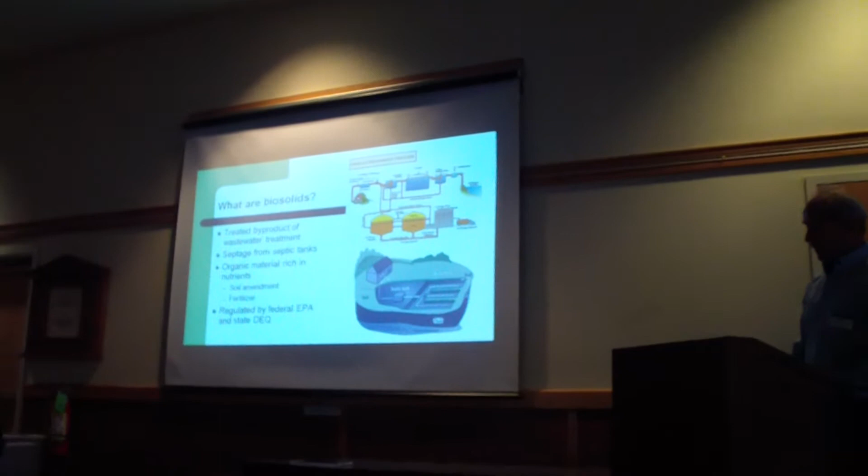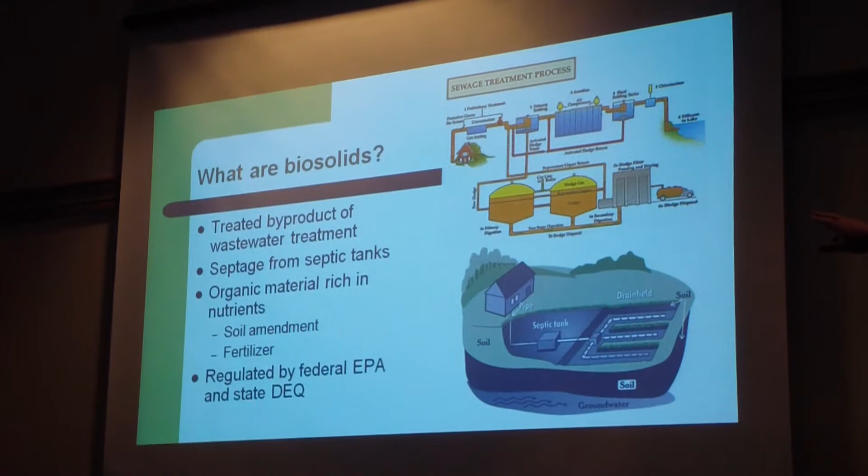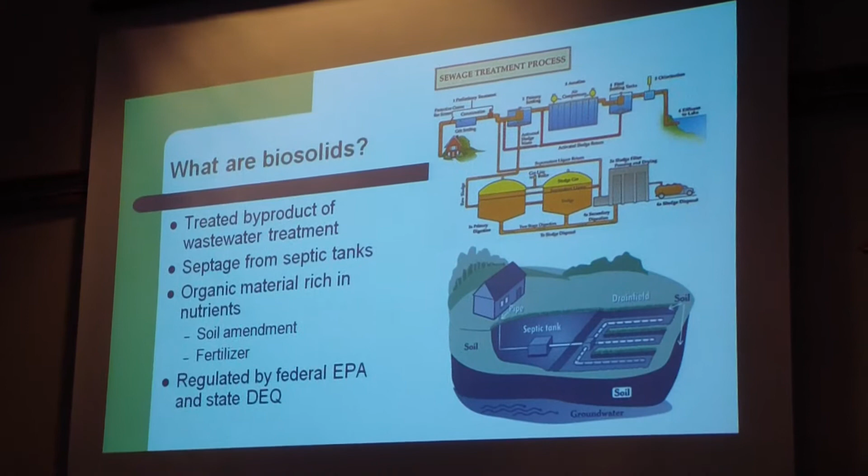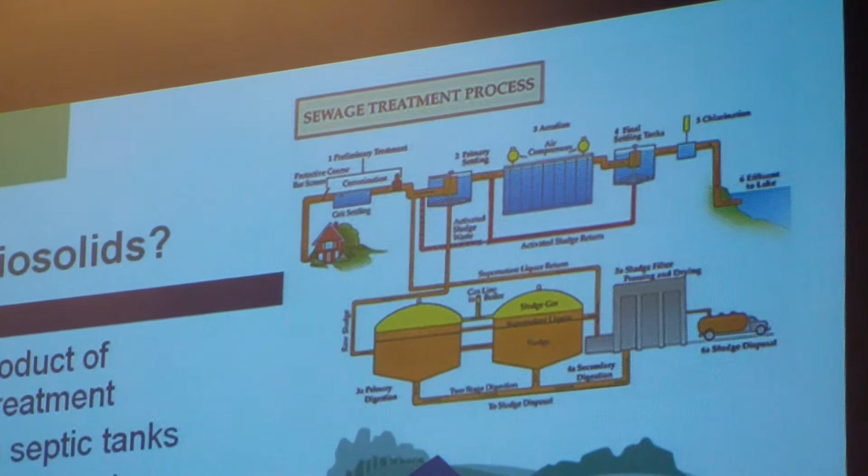So what are biosolids? Biosolids are created in two ways here in the western part of the state. In the top picture you'll see a house, connected to a wastewater plant, usually representative of a city. A single-family dwelling discharges waste to a toilet, which goes into that treatment system, and that is called sewage sludge. For a single-family dwelling in a rural area with a septic tank and drain field, that's another type of treatment and another type of sludge, or septage. Both of these are generated through us, through what we eat.

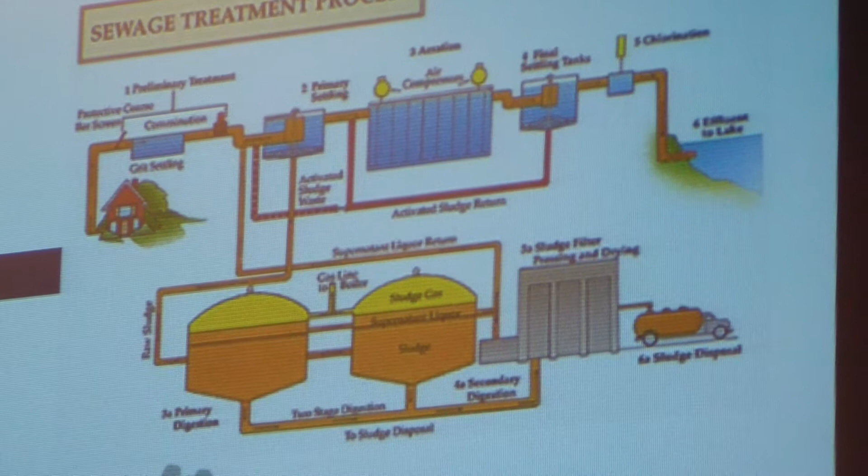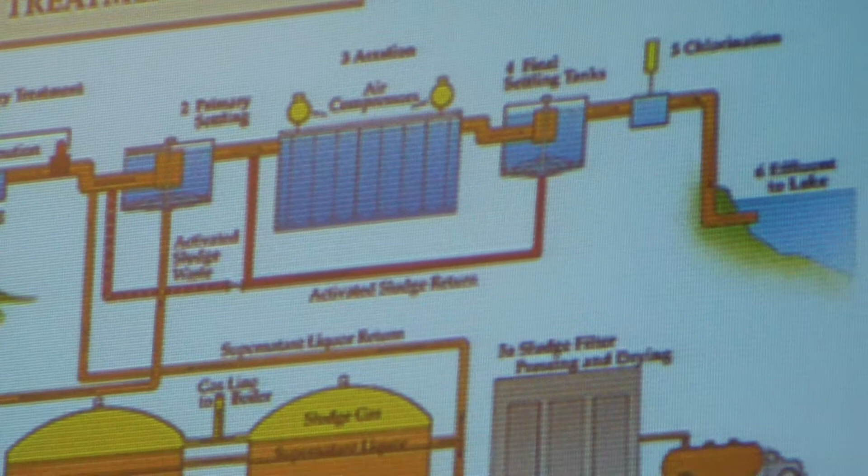The organics are nutrient-rich. They're like a central vitamin for the soil. Once they're broken down and stabilized, they're good for the soil, good for the system. You can sequester carbon, and it's regulated by the EPA and the DEQ.

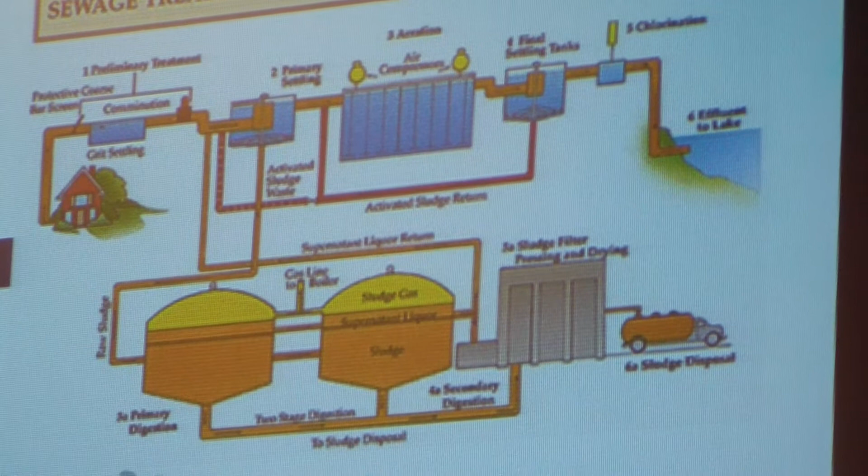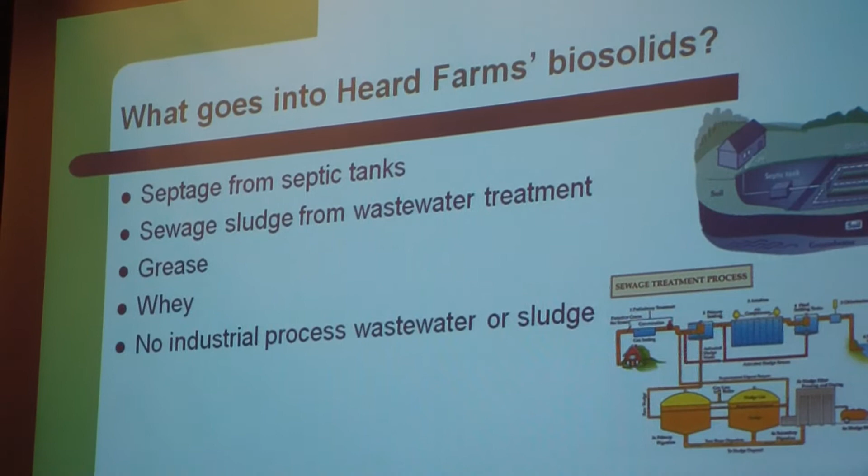So what goes into the Heard Farms facility is, again, the single-family dwelling septic tank. If it works right, it's settling solids and rising up the scum. You've got baffles in your septic tank, so the clear zone, which is the liquid, goes out into the drain field, and that's attenuated by the soils. That's how your soil system works.

When your septic tank gets about 35% full of scum and solids, you get it pumped, and that's what goes to the Heard facility. That's cold anaerobic digestion. It doesn't have a lot of volatile solids, but it's been sitting in your tank for 4 to 12 years, depending on how many people are on the system and how well it's digested. So it's pretty stable stuff that goes into the Heard facility. It's a pound in, pound out — it doesn't get a lot of reduction in that type of waste.

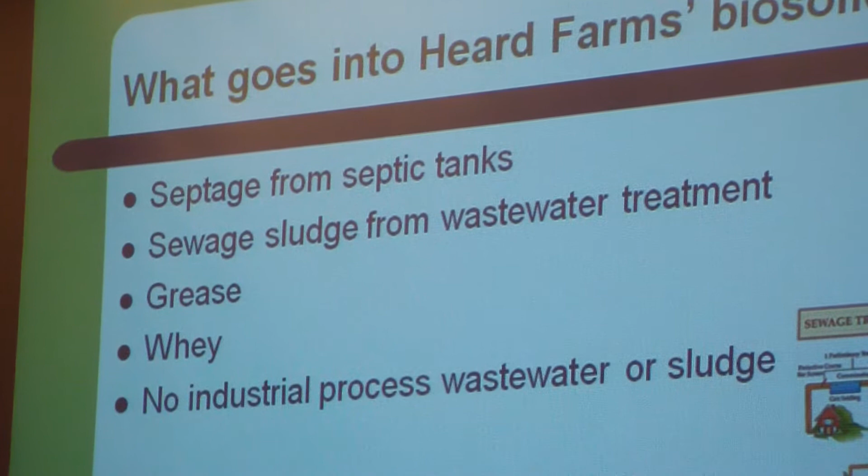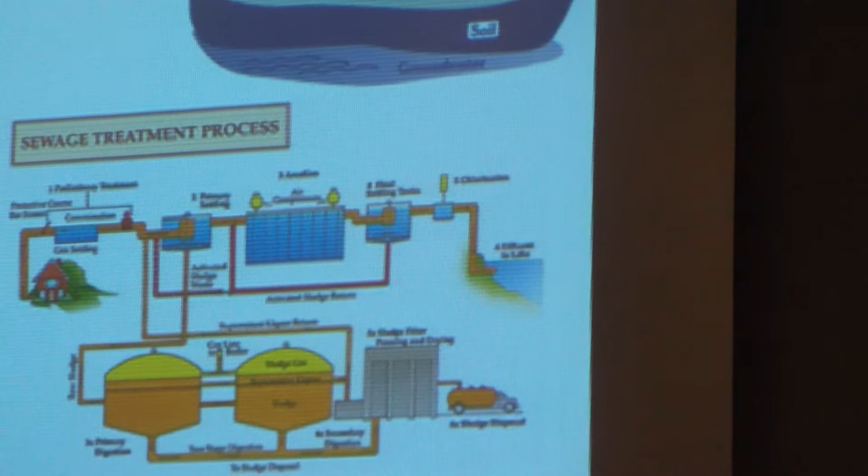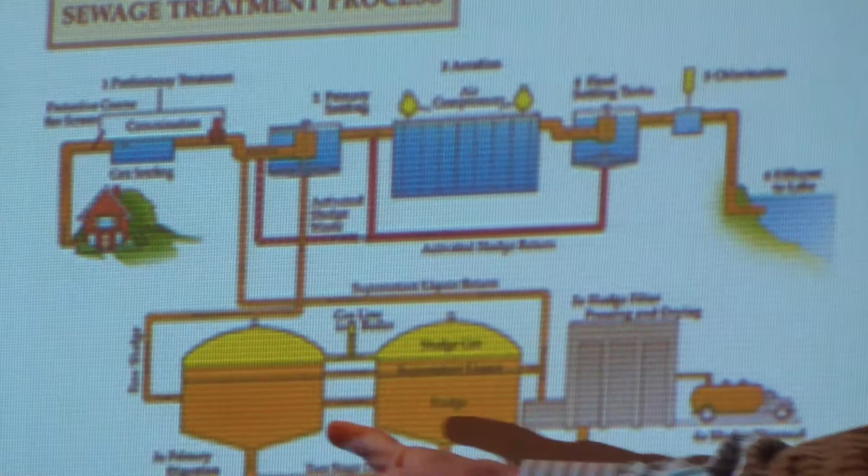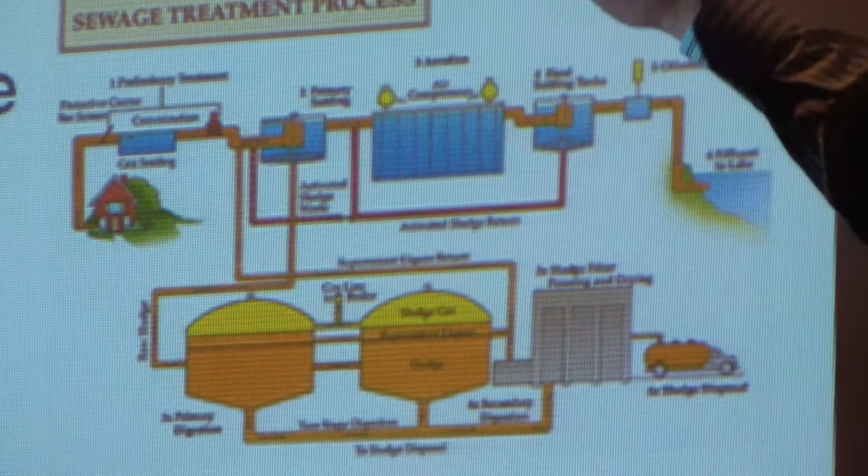You go down to this type of system here, and you've got two types of settling basins before a bioreactor. Both will pull out solids, scoop them up, and put them into bottom basins called digesters. A lot of things come through here that are raw, green, fresh, with a lot of BOD, so there's an opportunity for volatile solids reduction in both of these kinds of digesters. These are the type of things pulled out of a municipal system, put in a truck, and sent to Heard Farms, just like septage would be pumped from a tank and that pumper truck would go to Heard Farms.

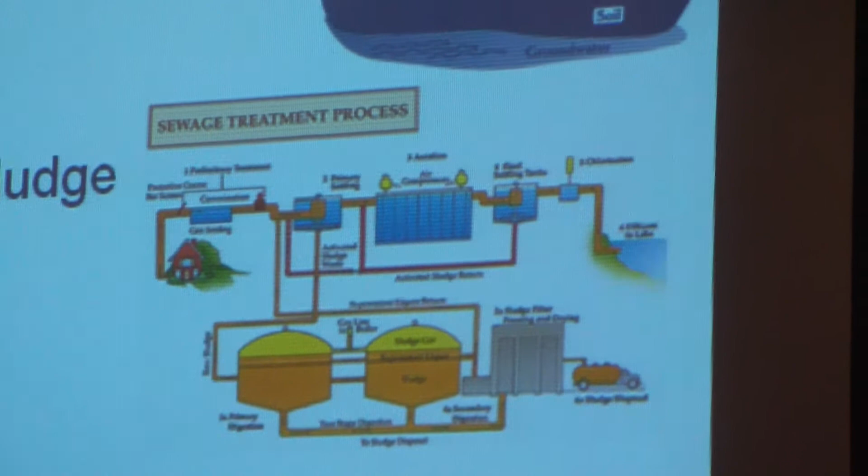And by BOD, Paul, what do you mean? Oh yeah, biochemical oxygen demand. It's how reactive something is — the microbes eat it up and consume oxygen to break it down.

I think that's it. Next slide.

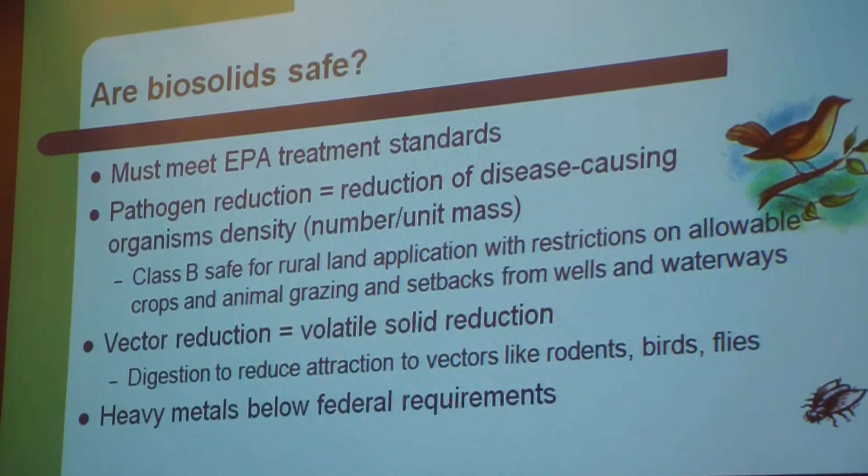So, are biosolids safe? Yeah, you have to meet three things essentially for biosolids to be land applied: pathogen reduction, vector attraction reduction, and metals. Pathogen reduction — what we're looking for is raw sewage, raw manure, any raw fecal matter can have organisms at 10 to the 9th. When we go through that digestion period, either in the septic tank or the wastewater treatment plant, those yellow basins, we get a reduction in pathogens to 10 to the 6th. So we get 3 orders of magnitude reduction, or about 99.9% removed. For biosolids, that means there may be pathogens present, but in small amounts, and it's safe for land application on rural properties and farmland. If it's made Class A, it's safe enough that pathogens are non-detected, and you can put it on your garden. A lot of my front yard is Class A biosolids.

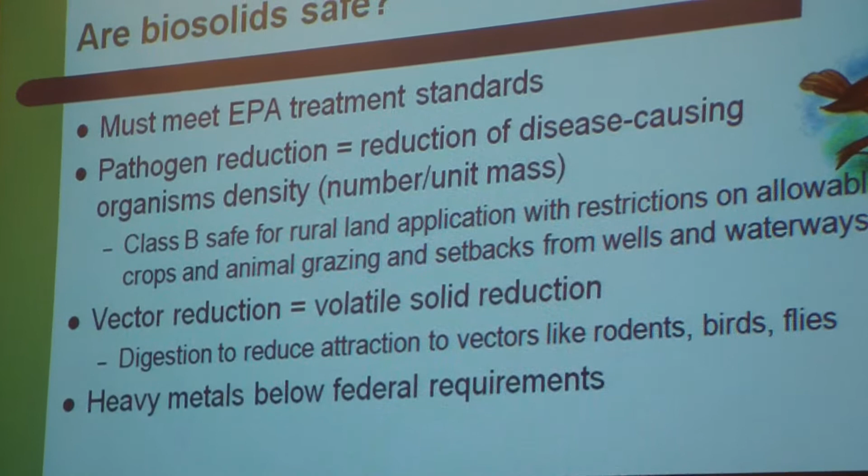Vector attraction is how stable it is. Typically we measure that by a 38% volatile solids reduction — how much the biosolids offer up to the microbes to break down, how much oxygen they consume. That's a measure of reduction, typically done in a wastewater plant. And then metals — again, they're fairly low because it's what we eat.

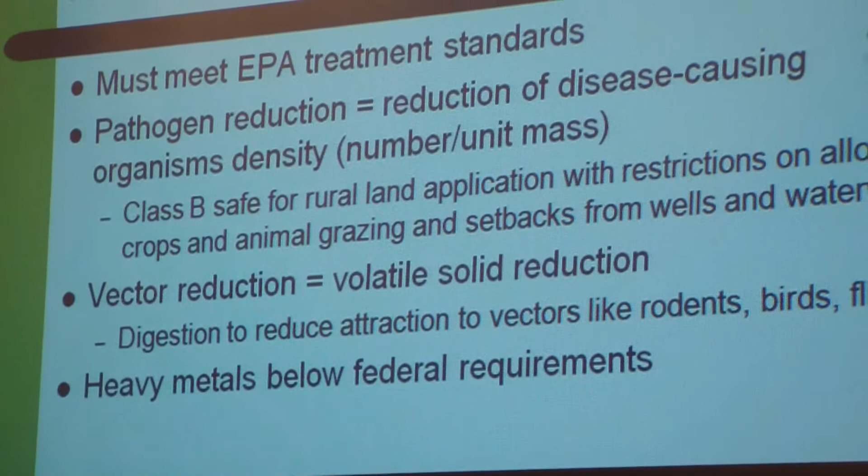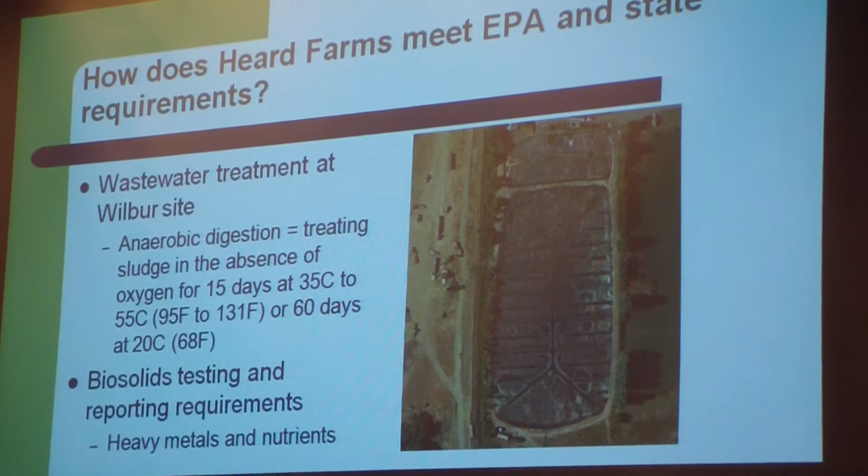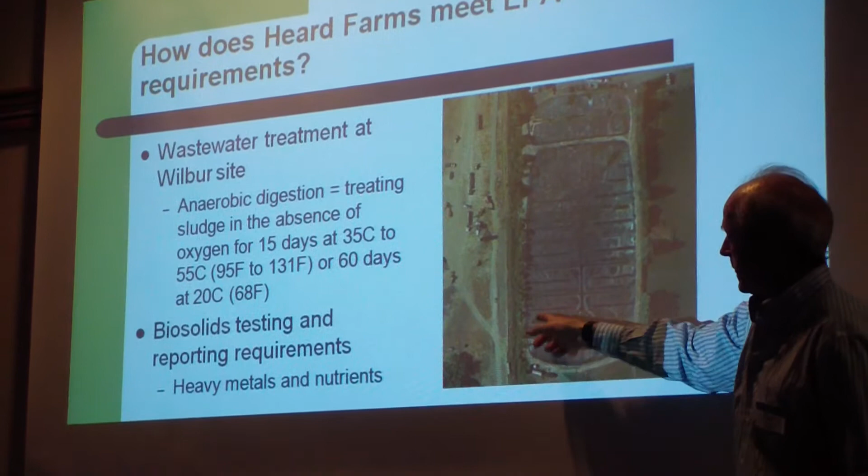So for the Heard facility, it's anaerobic digestion, so there's no oxygen involved. There's a primary cell here, and all the material comes in through a screen. It goes across this primary cell and is pumped over to a larger secondary one. The material is pulled out of the back end of this thing after it's gone through a primary digestion and then a secondary polishing.

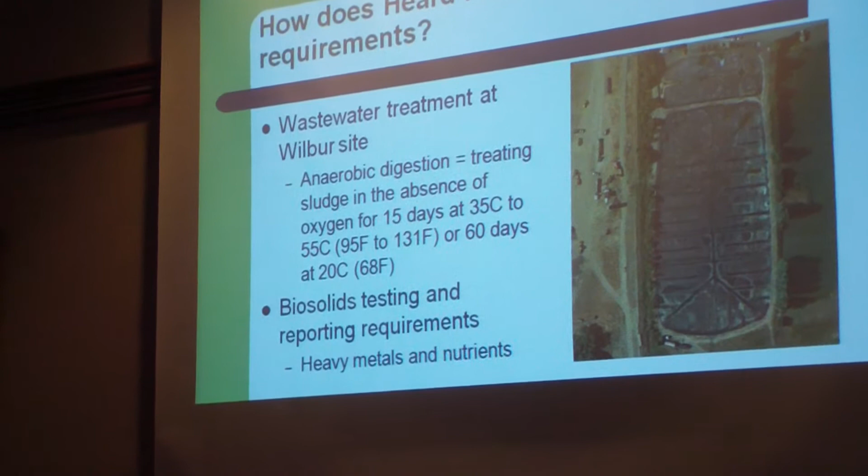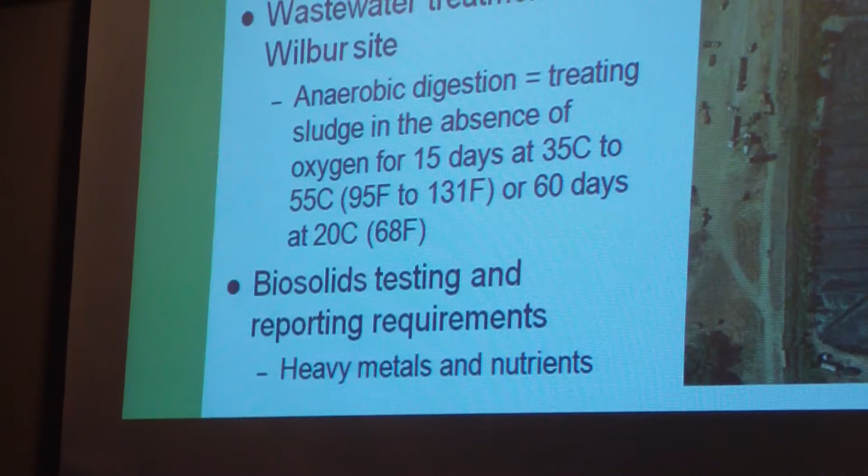Typically, for anaerobic digestion, you need anywhere from 15 to 60 days at a certain time and temperature for the bugs to work, and that's how they're measured. How Heard Farms shows it is through testing requirements on a monthly DMR and also in annual reports, for nutrients, land application loading, and for metals.

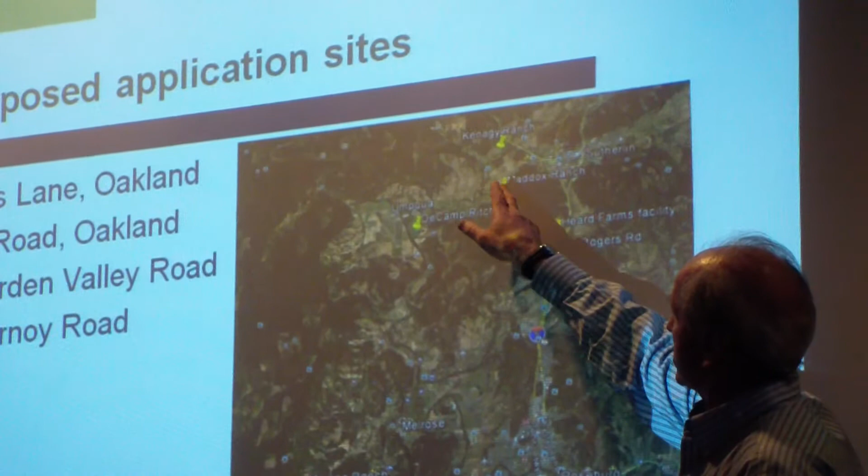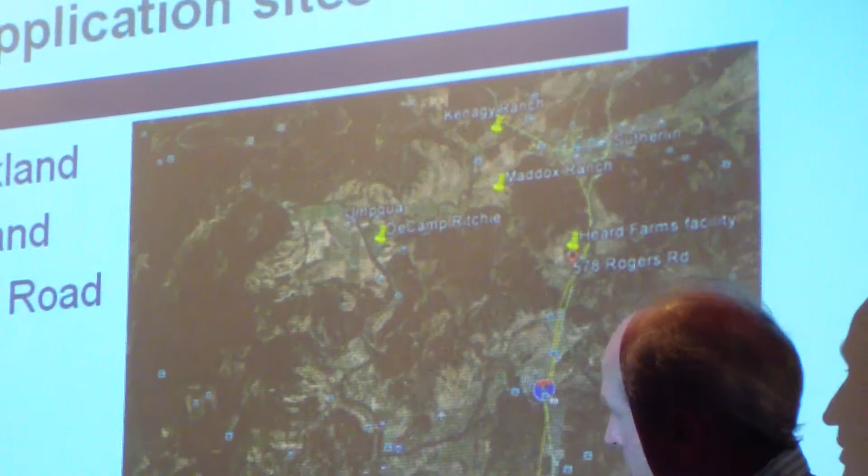So the four proposed sites that we're talking about: here's the facility right here in Wilbur. There's the Kenagy, the Maddox, which are actually just west of Sutherlin - they say it's Oakland, but it's really kind of off in the Sutherlin area. Umpqua, the DeCamp, and then the Morgan site out close to Touchstone.

So the site authorizations - what we did is we went out and canvassed all the sites, we augered holes, we did the soil types, we verified them. So we drafted up those authorization letters, which if you got a packet, you got a copy of those, and it goes through all the criteria, the soil types, the sites, the setback tables. Agronomic rate is what the crop will use as far as nitrogen nutrients in the growing season.

And so that's what we're basing the land application of biosolids on, is the nitrogen content in the biosolids at the time of use.

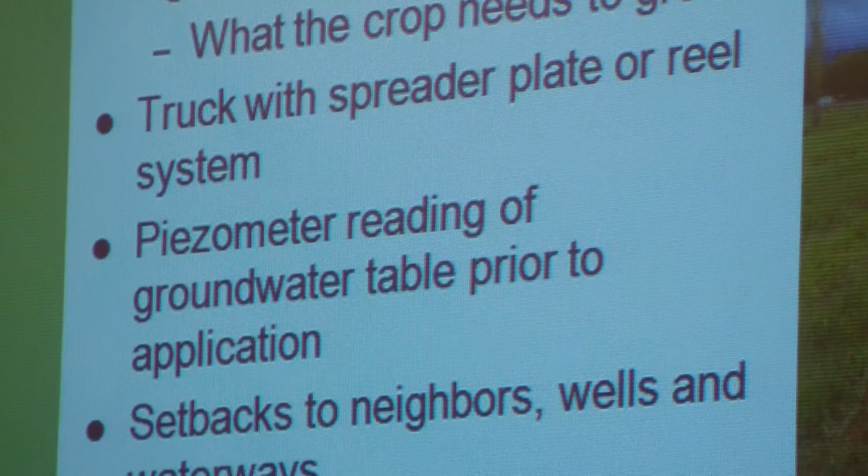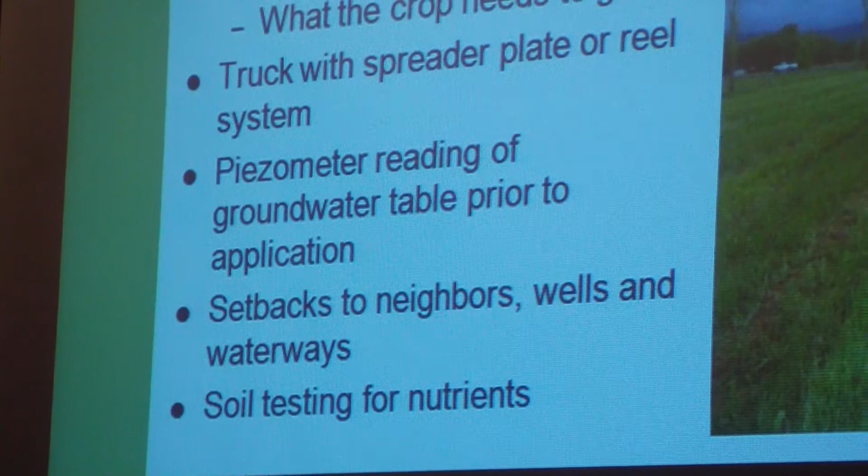Typically, the biosolids are spread with a spreader plate or a reel system with a sprinkler head or spreader plate, so we get this even veneer across the field. You can see that this is a pressurized truck, so it's getting a very, very thin veneer as it goes across the field. It's not a big pond of water that sits there for hours and hours.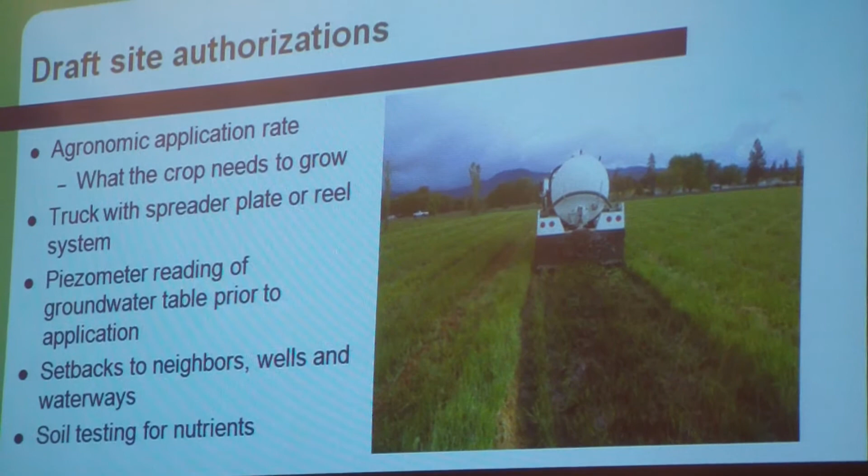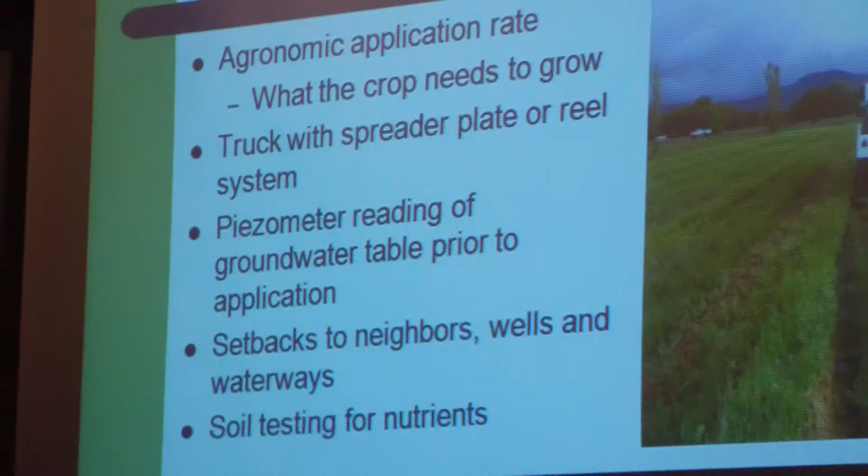Herd farms also has requirements for wet soils as far as the piezometers are concerned. That's a perforated pipe that goes down in the soil that would be checked to make sure there's a separation of 48 inches from the soil water table to the ground surface. So in order to land apply, the water table has to be below that 48-inch depth at the time of land application.

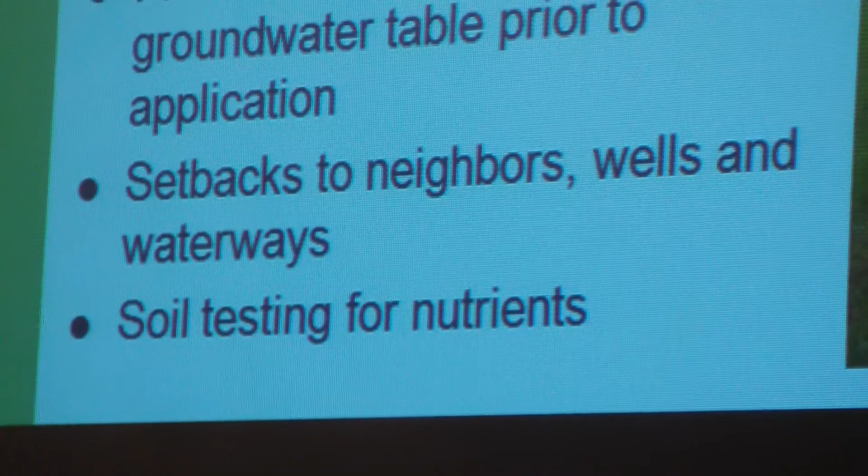The setbacks - the wells, the setbacks and neighbors - it's in the packets. If the site's used 2 out of 3 years, then there's a requirement for the herd farms to do soil carryover nitrogen testing. So they go out and pull samples, see how much nitrogen is in the soil, how much it's built up if it has, and then we'd subtract that from the next year's land application if they were to use that site.

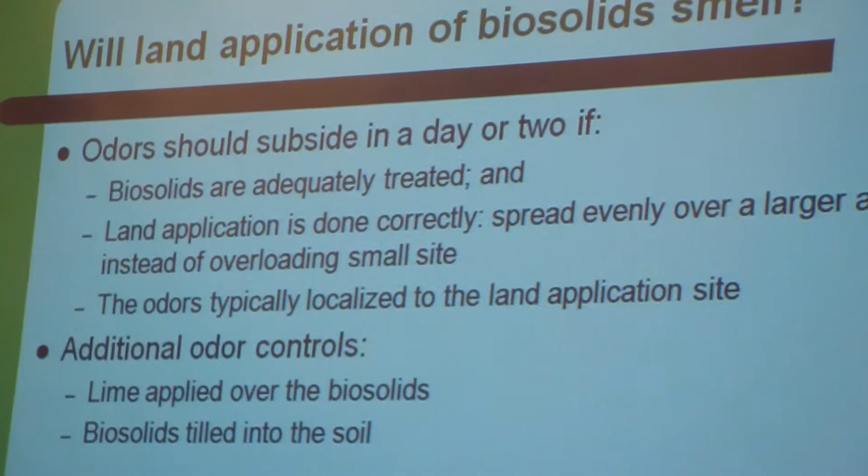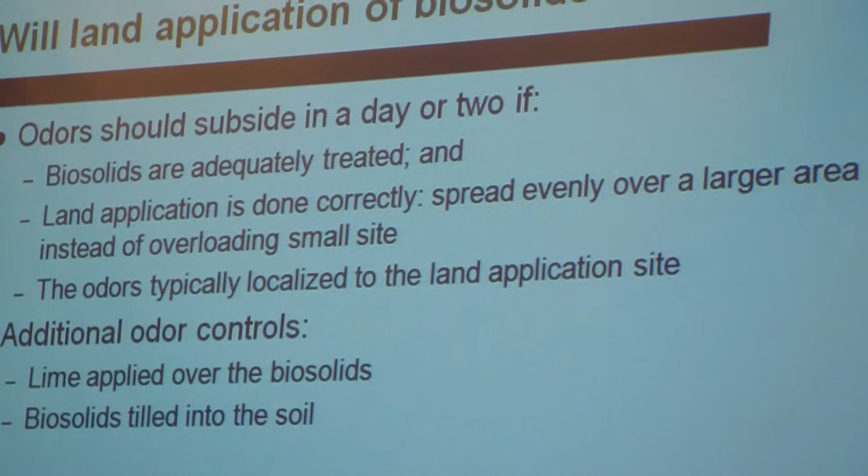Biosolids do have an odor, and it's dependent on how they're treated - what's the process they use to make the biosolids. Sometimes it's kind of a sweet, musty smell. Sometimes it's ammonia, it could have sulfur, it could be a heavy ammonia smell. These compounds are typically products of polymers, dewatering processes, anaerobic processes, and so it can have odors.

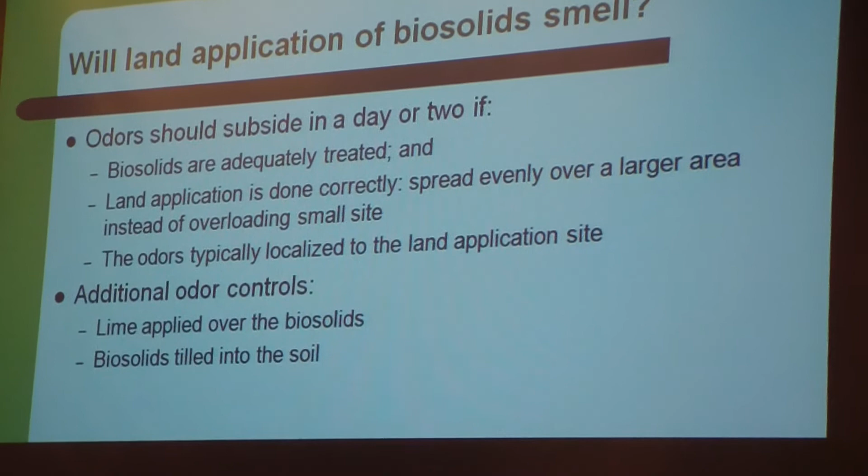But the disulfides, the mercaptans, the sulfur is a plant essential nutrient, so is the ammonia - those are things that would be used by the plant to grow. Odor controls: we can go out and lime it, we can disc the soil in, we could actually spread it thinner so it dries more, rather than going back over it several times the same day. So there's things we can do to mitigate odors.

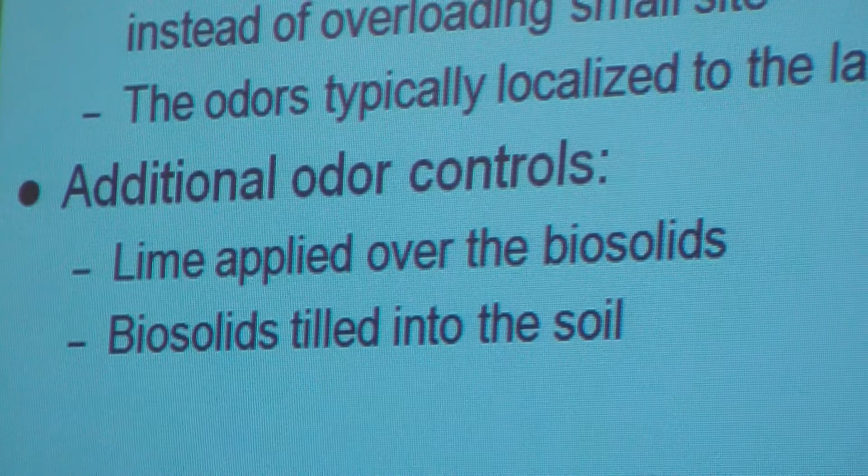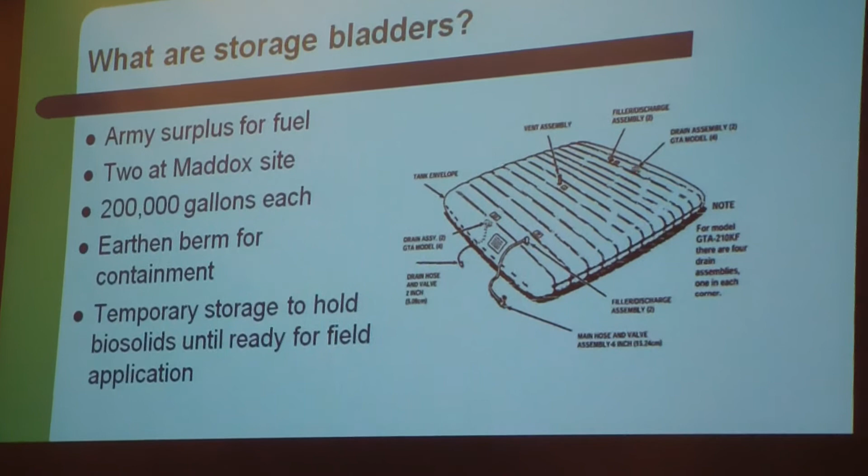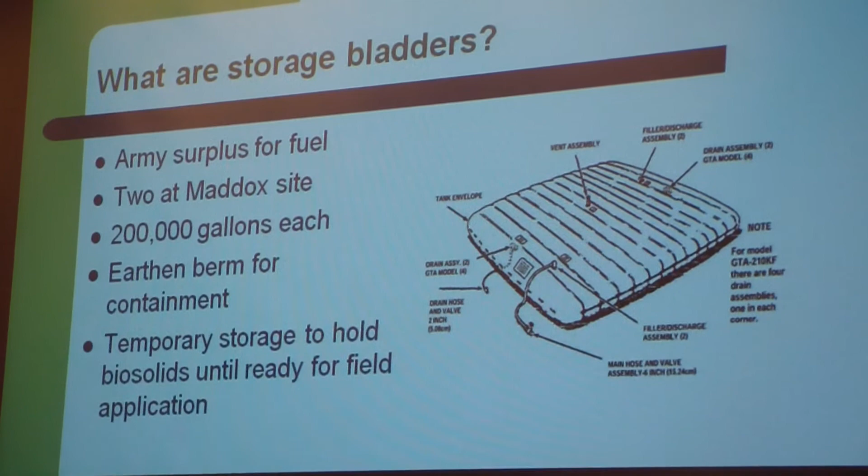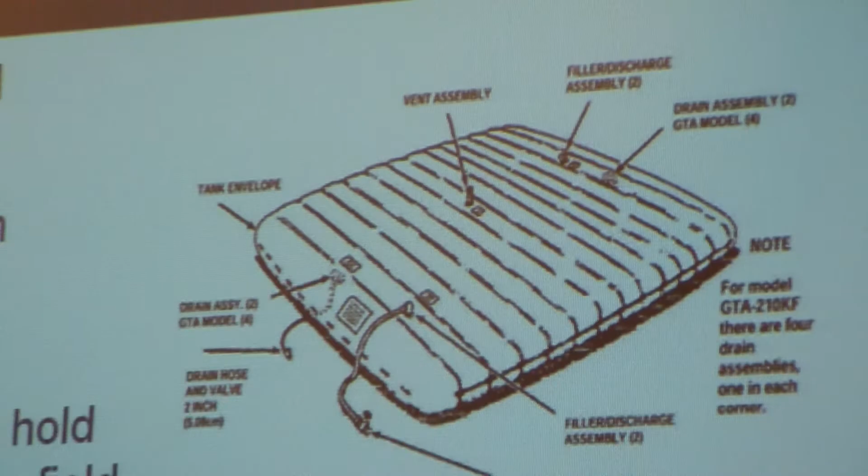Before we start - comments or questions?